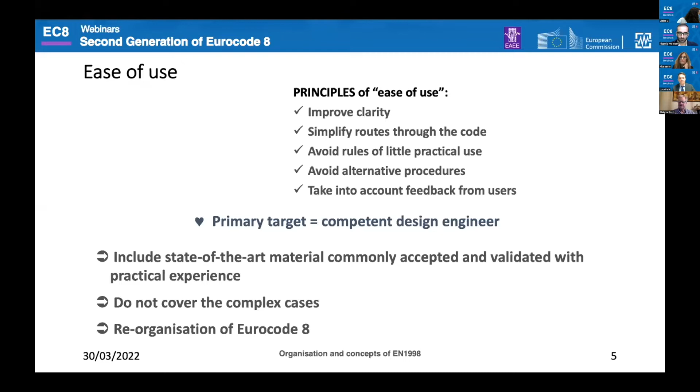Okay, so the general rule for a standard is to include the state-of-the-art material. So of course, all the recent scientific developments are accepted, but they should be, perhaps not worldwide, but accepted by the community in general. So it's not specific to one country, it's general, accepted and validated by experience. So consequence is that we do not cover all the cases. In particular, the very complex cases are not covered by the code. It's not the place for that. And as concerns Eurocode 8, the consequence for this clarification, for this ease of use, is to have a new organization of the code, and I will explain that later.

So one side of this clarification is to be clear on the meaning of the requirements. And there was a very important work made on the verbs which have to be used for the development. And in principle, in the texts themselves, in the requirements themselves, you will find only these three words.

So 'shall' is what we call previously a principle. This is a requirement which is strictly to be followed in order to conform to Eurocodes. And so for a principle, there is no allowed deviation.

'Should' is a strong recommendation. So in very specific cases you may have deviations, but of course it should be completely justified - either in a national regulation for a local situation not really covered by the Eurocode, or in the case of a rather complex structure not completely covered by Eurocode. In that case, you can justify that you cannot apply such a rule. Once again, the Eurocodes are here to cover 80 or 90% of situations, but not all, so it is allowed to have some deviation to cover the rest.

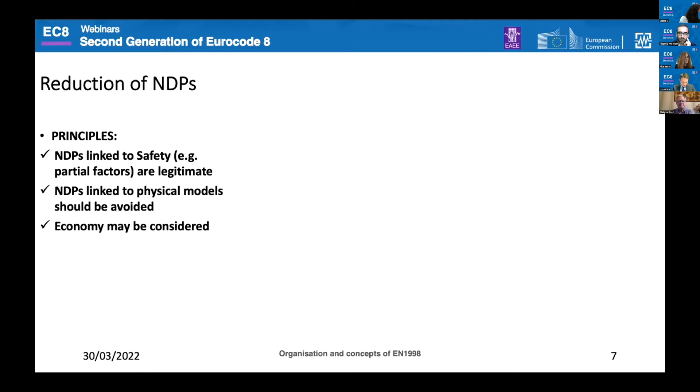In the case of Eurocode, in this table the organization is not exactly the same. On the left you still have 6 parts, but organized differently. I've tried to make a parallel: in the first column you have what we have now in the first generation, and in the second, on the right, what is anticipated now in the second generation. You can see that we have divided by about 2 the number of NDPs, and we have taken care in EC8 to focus only on the safety aspects and not introduce NDPs in physical models.

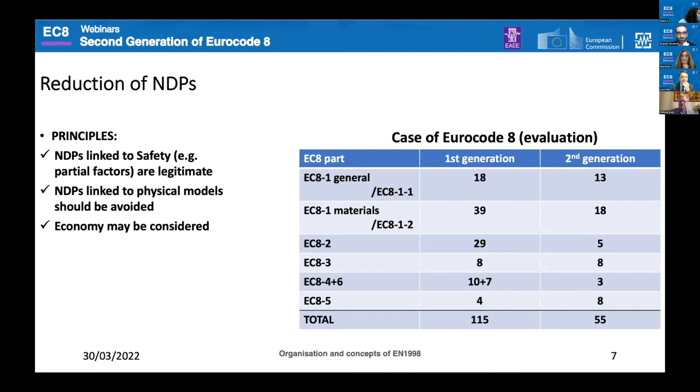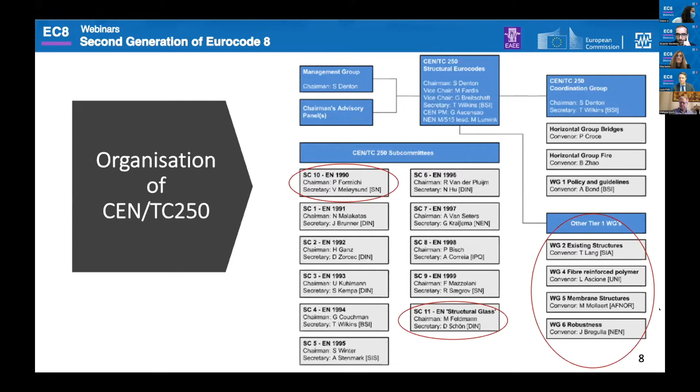So there is one on fiber reinforced polymer, one on membrane structures, and there is one which is transversal, in fact for all, which is a development about robustness of structures.

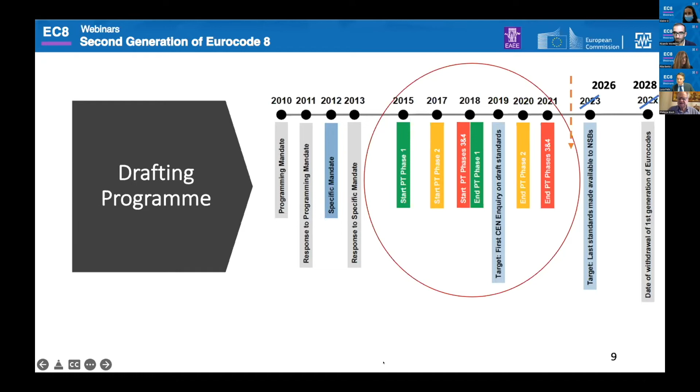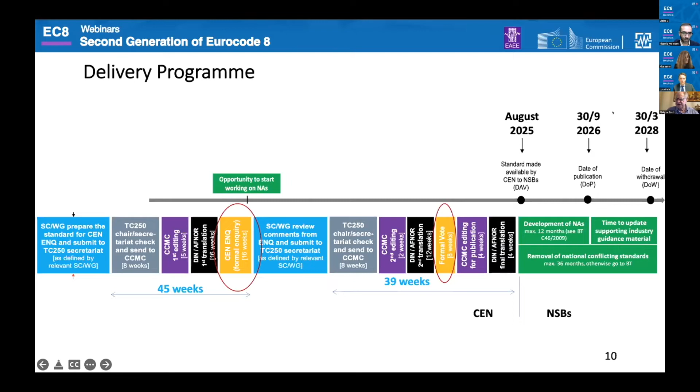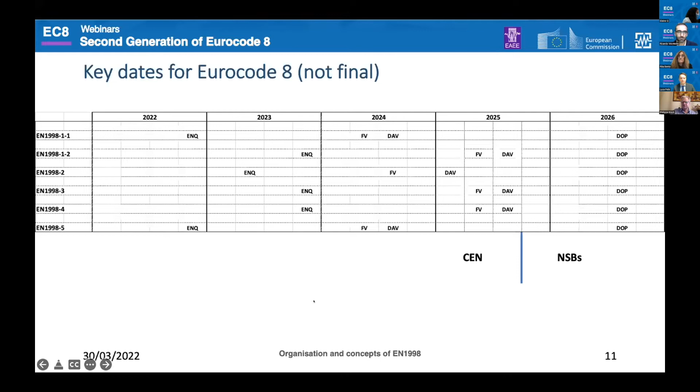Okay, after that, we'll have to, of course, take into account all the comments received and draw new drafts for final votes.

So there was, in the first generation, some inconsistencies between the general definitions given in Eurocode 0 and the ones that we were using in Eurocode 8. This has been, we have tried to align, in fact, to the definitions given in Eurocode 0.

And if you look at the definitions given in the first generation, in fact, there were not so many differences between what we call the importance classes and the consequence classes in Eurocode 0. So we have decided to align.

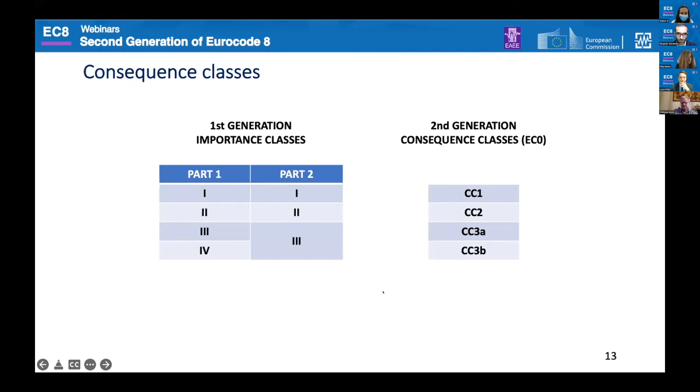The second point was about the seismic situation and the limit states. In Eurocode 0, you have clearly 2 types of limit state to verify: the ultimate limit state and the serviceability limit state. But it was rather different in the first generation of Eurocode 8, because you had these definitions: no collapse and damage limitation in part 1.

You have 2 similar limit states, but with different names in part 2. And in part 3, for assessment of existing structures, you had another one, a near collapse, which was added. So you can see it was not really very consistent, but of course this was explained by the calendar of development of the different parts.

So now what we have done is try to completely comply with the general rules given in Eurocode 0. We have also added another limit state, which is operational, so you can understand what it means. It may be used, for instance, for critical installations in hospitals or things like that, to assure the operability of the service during a given level of earthquake.

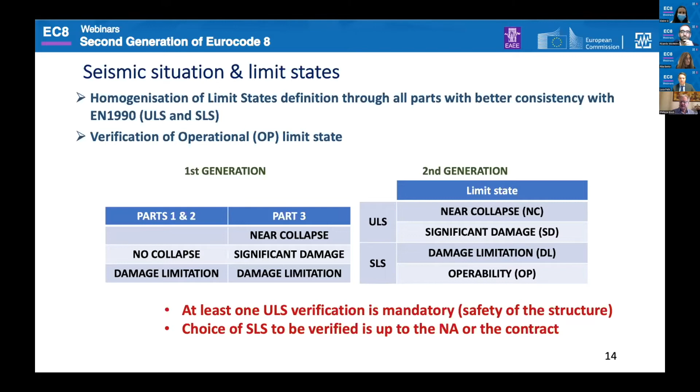In the different parts that we have, verification of at least one ULS is mandatory. The main aim is to assure the safety of the structure and of the people. But the choice of SLS is now open — for certain types of structure it can be in the national annex, or it can be in the contract. You will have the technical rules developed here, but it is up to the authority or the contract to decide whether they carry out this type of verification or not.

So what is new in Eurocode 8? The first important thing is that, in order to have a clearer organization, we have changed the contents of the parts. Not all of them, but the new organization is as follows.

Another target was to avoid repetitions. If you look at the present parts 1 and 2, between buildings and bridges, you had repetitions and even sometimes inconsistency. It was very important that all the rules common to all types of structure are in the same part. So you have a general part where you find the description of the seismic action, and the general rules of verification and analysis. Everything is there, and these general rules will not be repeated in the parts dedicated to structures — they will only be a reference.

Likewise, all the general rules linked to geotechnics or foundations are now in part 5, and so they are also common to all types of structure.

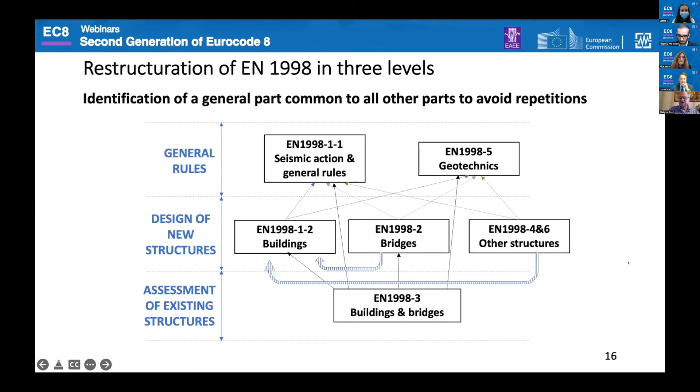So the second stage is for design of new structures. You have buildings, now separated from the general rules. You have bridges, as before, and all the other structures have been merged into one single part, which is now part 4. Part 3 has the same objective as previously: to cover the assessment of existing structures, but we have now included bridges in this part.

So a small list — it's very limited, just the main points of content now included in the scope of Eurocode 8: the verification of the operational limit state, the development of the displacement-based approach, and a complete development for structures equipped with anti-seismic devices, not only base isolation as before.

So there was a request from the Commission to have a harmonization of seismic zonation. This is an important point which will be detailed by Pierre Labbé later. Soil structure interaction has also been developed, ancillary elements in all structures, in fact, not only buildings, flat slab systems in buildings, infill frames and claddings in buildings, aluminum structures in buildings, bridges in part 3, so for existing bridges, timber structures in part 2 for bridges, and part 3 for assessment of existing structures.

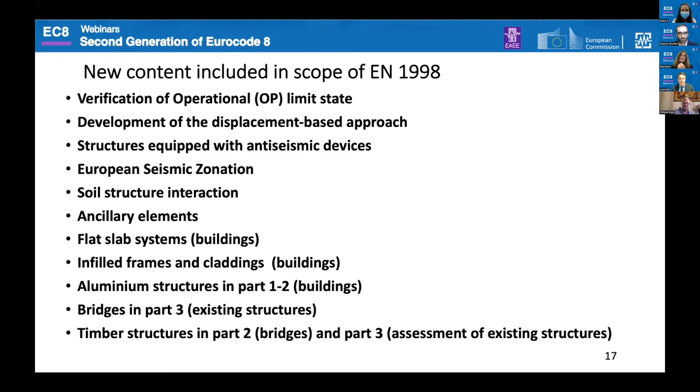So you can see, of course, there are more, but okay, here you have the main ones. But you also have changes of what exists already. So you have a long list of things which have been improved. The first one is about the seismic zones. You have a homogenization of the definition of the seismic zones. The simplification of the global safety choice through the seismic action classes. So you will have detail on that.

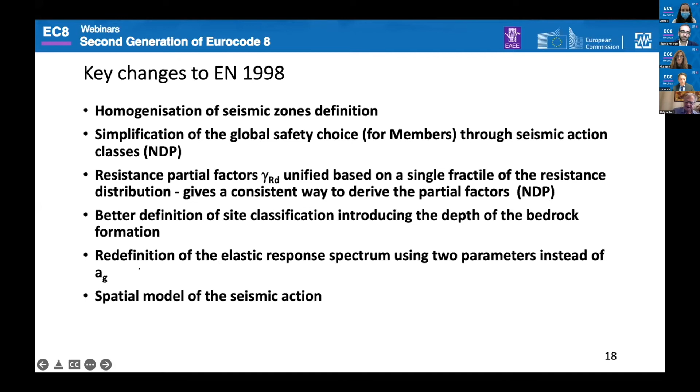A unified way of deriving the resistance partial factors on material. A better definition of site classification. So you will have also the details on that later. The redefinition of the elastic response spectrum, which is now based on 2 parameters instead of the ground acceleration, and the spatial model of the seismic action. You have a new definition of the ductility classes. Okay, you have 2 equivalent approaches for the analysis. You can use the force-based with the q factor or the displacement-based.

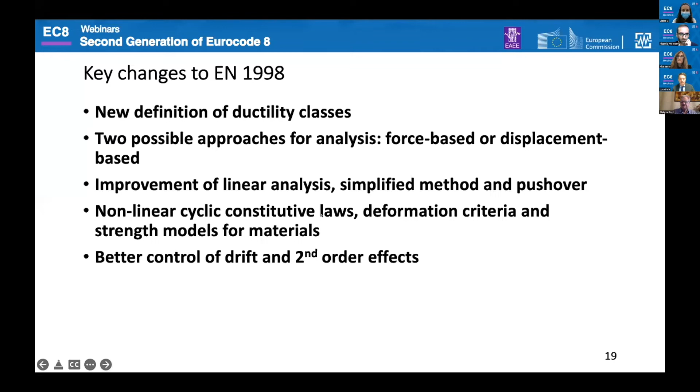You have several improvements on analysis. You will see that later. You have a better definition of the non-linear cyclic constitutive laws of materials, and a better control of drift and second-order effects. So coming to the general objective of the code, okay. You have this in your introduction, although it is in the introduction, so it is not mandatory. It is a good explanation of what we are doing.

So by nature, a perfect protection against earthquakes is practically not feasible, in particular because the knowledge of the hazard itself is characterized by a significant uncertainty. Okay, so what is important here? Therefore, in Eurocode 8, the seismic action is represented in a conventional form, proportional in amplitude to earthquakes likely to occur and representative of their frequency content. This representation is not a prediction of a particular seismic movement. Okay, so this is important. You know that when we introduce the seismic action, it is not a real earthquake, it is a representation of the earthquake.

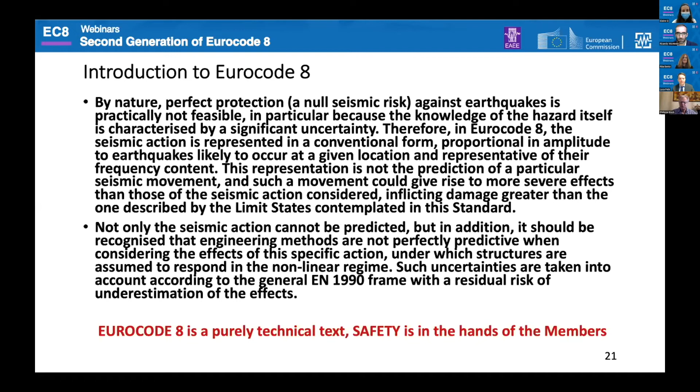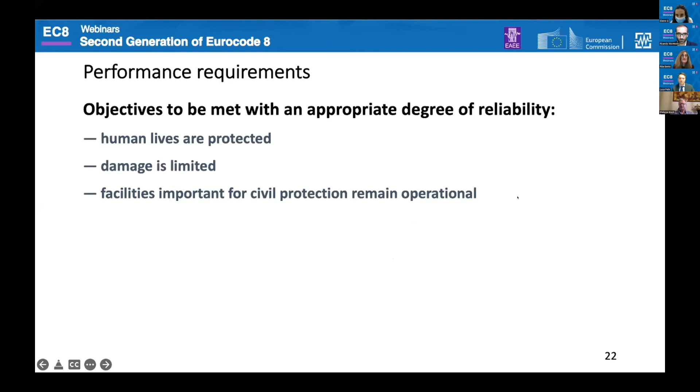Now there is another point which has been clarified because it was not always the case. Eurocode 8, as all Eurocodes, is a purely technical text. Safety is in the hands of the members. So we have to explain to the members what are the tools to be used, but we don't take their place. So it is purely technical, and we have tried to clarify this in all requirements. The performance requirements have not really been changed, and you know them: human lives, damage, and facilities important for civil protection remaining operational.

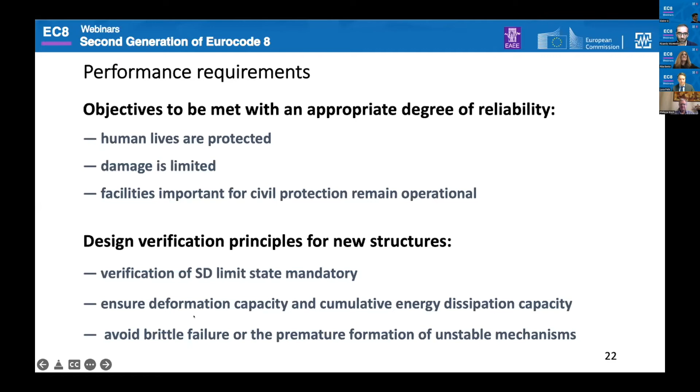The design principle: verification for new structures, so verification of the SD limit state. It is mandatory for new structures. To ensure deformation capacity and cumulative energy dissipation capacity. So this is, of course, important in all types of structure. And of course, avoid brittle failure and unstable mechanisms. So you have a description of limit states. I will not enter into that because we are late, I think.

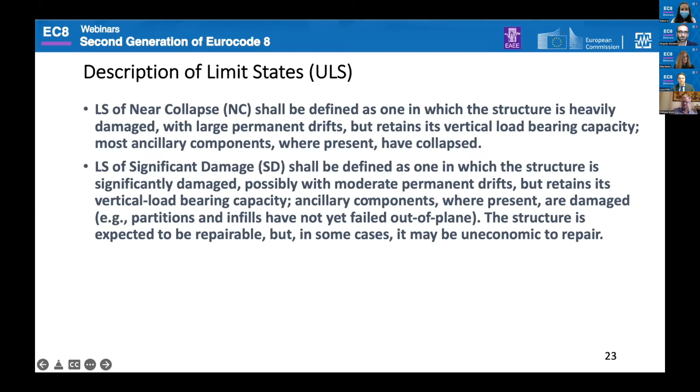Okay, so you have 4 definitions of the limit state. The objective of that is just to describe to the user what is the state of the structure which is expected at the end of the earthquake. So it's not a commitment, it's just a description of the target. Okay. So you have 2 safety choices for buildings. I think it will be explained in more detail by Pierre, so I will go rapidly on that.

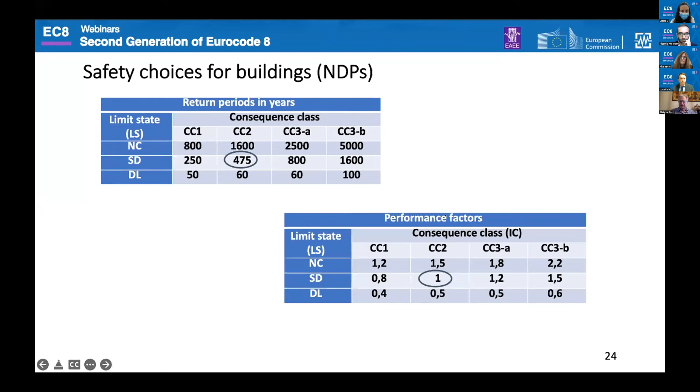So you have 2 ways to define these safety choices. It is either by the return period, and it depends on both the consequence class and the limit state under consideration. So it's no longer an importance factor. Before, you had an importance factor; now you have this approach in return periods, or the other one. The choice between both is made at the national level. You can use these performance factors, which in fact look like the importance factor that we had previously, but you can see that they are much more detailed.

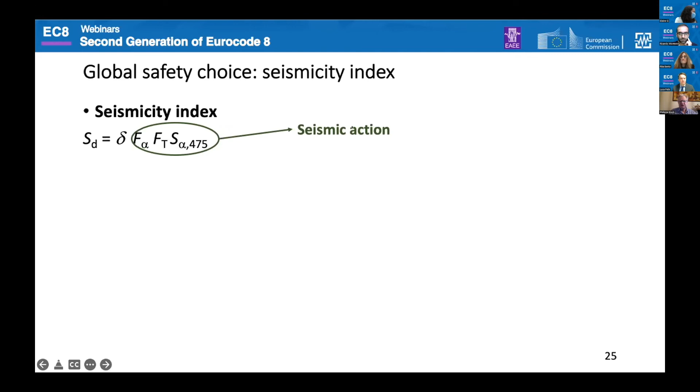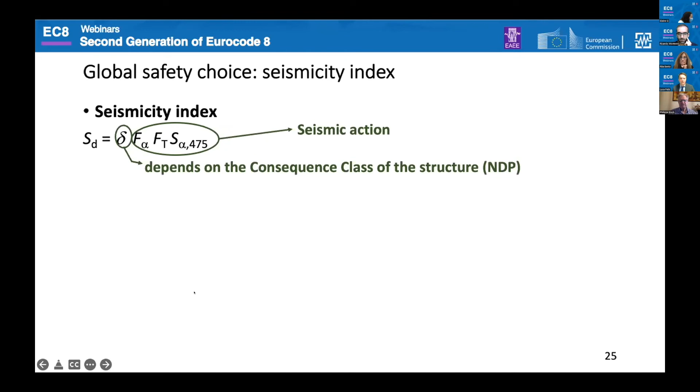This is a safety choice, so the seismicity index. It will be explained in more detail by Pierre. I don't enter into detail, just to say that in the definition of the seismicity index, you have a part which is only due to the seismic action. So let's say it is physical, and the choice which is given to the member state is about this value of delta, which depends in fact on the consequence class of the structure. So it is a global way for a given type of structure. So the values of this delta are for each type of structure.

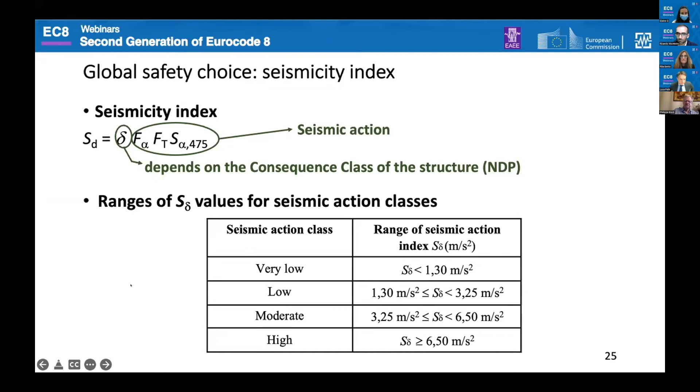And once this is chosen, then you have to refer to this table, which is fixed, and to classify the seismic action into seismic action classes. Okay. So once again, this is a safety choice, and it is not the same as the classification of seismic zones, which itself is based only on seismic action consideration.

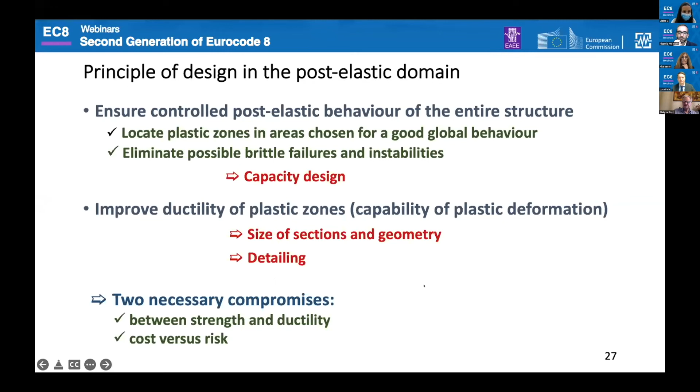Now, why redefine the ductility classes? Previously you had 3 classes, L, M, and H. Let's say M and H were based on the same concepts, except that H was based on more stringent rules, and the observation, so this is feedback, was that in fact DCH was not used very much. So this has led to the decision to try to do something else.

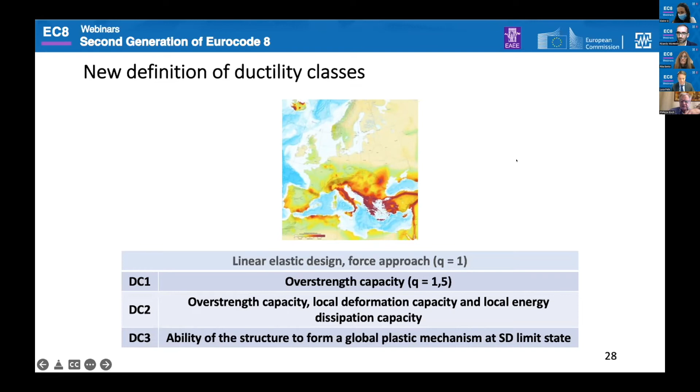So DC3, of course, can be used everywhere. It is a class with high ductility, where we assure the ability of the structure to form a global plastic mechanism. So it is a global behavior of the structure. DC2 aims at covering all the intermediate seismicity cases. Then you have a more local approach. So the local deformation capacity is assured, and there is some overstrength. So the definition is different and the practice is different.

Another thing we have done is to make the decomposition of the Q factor in 3 parts. The first one, what is called QS, is the overstrength. It is the one that we are using in DC1. So DC1 is similar to DCL. And this has been fixed at 1.5. We don't want to have discussion on that. It can, of course, basically be discussed, but we have decided to fix this to avoid conflicts.

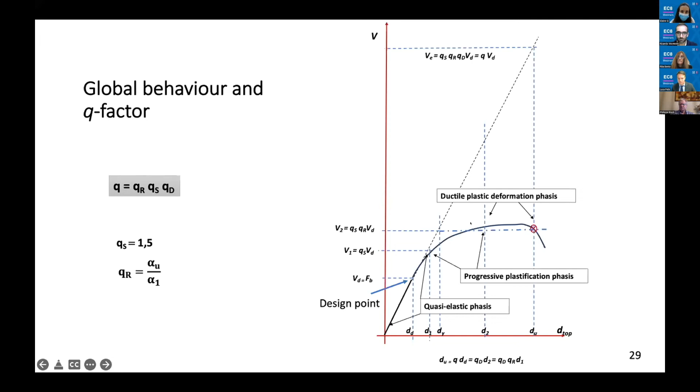QR is what was called before alpha U over alpha 1. So it represents the hyperstaticity, the redundancy of the structure. And QD is directly linked to the ductility itself, so it is the length of the plastic range. So you have here the comparison between, let's say, a pushover and a Q factor approach. So for that, in each material, you have the values of the different components.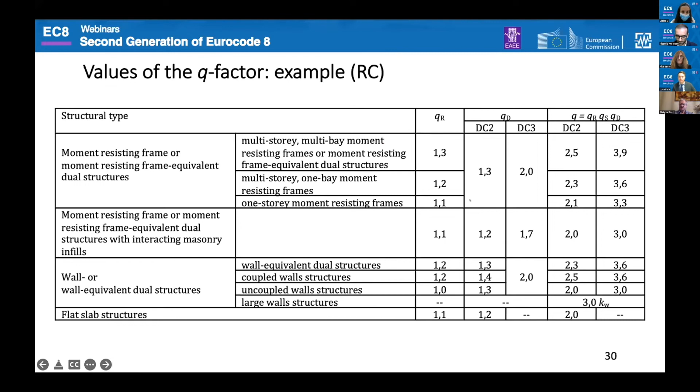So QS is always 1.5. You have here QR, which is similar, once again, to alpha U over alpha 1, and the value of QD, which depends only on the ductility class. Of course, QR does not depend on ductility class. Okay. Second point is that now you have limits.

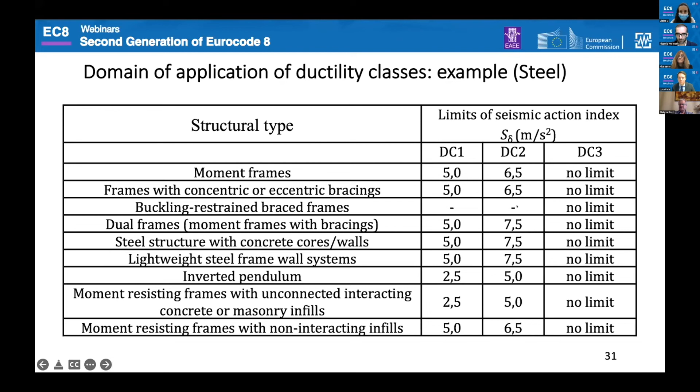But the limits, you remember that for DCL, it was recommended to use it only in low seismicity, but it was not reasonable because obviously the use of DC1 depends on the type of structure. So the limits have been differentiated according to the types of structure. The second point is that as DC2 has been developed for moderate seismicity, so now you have a limitation in the use of DC2. And of course, this depends on the type of material.

The verifications that you have to do, of course, they are the same as before: equilibrium, control of second-order effects, limitation of interstory drift, verification of member stability, so local stability, the capacity design for DC2 and DC3, and the verification of resistance, which of course depends on the type of material. For the force-based approach, of course, it is based on the other Eurocodes.

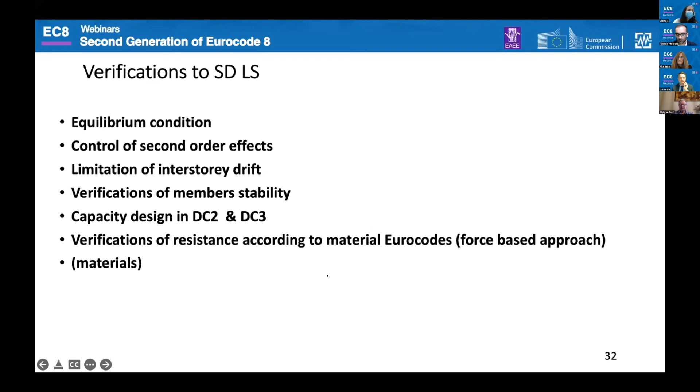Now for the verification in the case of pushover analysis. Okay, so you have two types of resistance. If it is a ductile mechanism, it depends on whether it is a rotation or an elongation or global, whatever it is. Delta is a parameter which defines a kind of deformation. Okay, so here you have the elastic deformation, and here you have the plastic branch.

Okay, so you can see that at SD, so significant damage, we have a coefficient here which places the target point somewhere on the plastic branch. Let's say alpha, it's a physical choice, so it is between 0.3 and 0.5. Okay, so we are approximately in the middle of the plastic domain. And above that, of course, you have a partial factor, which here is NDP.

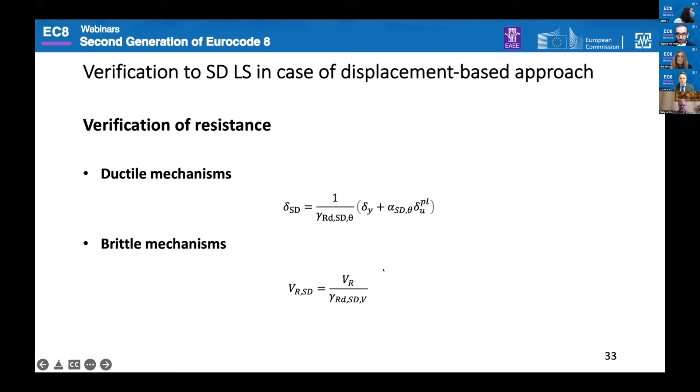For the brittle mechanism, for instance, shear in reinforced concrete, then you have, of course, the direct verification to shear resistance with partial factor. Okay, so I think it was long, but you can understand that there are many questions in your codes of interest. I tried to make a synthesis of this.

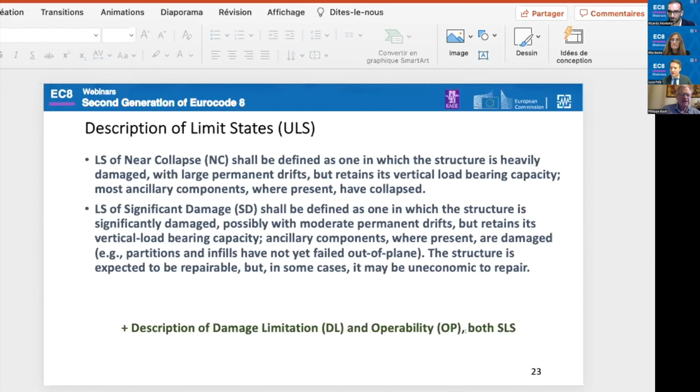Okay, thank you. There is another question by Andreas Nielsen from Atkins. I note the introduction of greater granularity in the return periods and the performance factors. Are the two parameters not really about the same issue, i.e. probability of failure or reliability? And if so, why have you chosen to specify the reliability in terms of two parameters when only one could be sufficient?

No, it's not exactly so. In the first generation you had the importance factors, but it was much less detailed than that. Now you have a complete table that depends on the consequence class and the limit state. Okay. So this is what was used by members with, of course, sometimes different values for the importance factor. But some countries, Portugal for instance, have changed that and have used the return period.

So what we thought was that it was convenient to offer the members the possibility to use both. Of course, they will make only one choice. So it should be in the national annex, where the member chooses between using the return period or the performance factor. So it is really, I would say, the feedback of experience. It is the observation of what exists now in the national annexes.

Okay. Now, as concerns the content, it is completely open to the choice of the member because it's completely about safety. So you have recommended values. They may be different for buildings and for bridges, for instance. So these tables are in the relevant parts, but you only have recommended values.

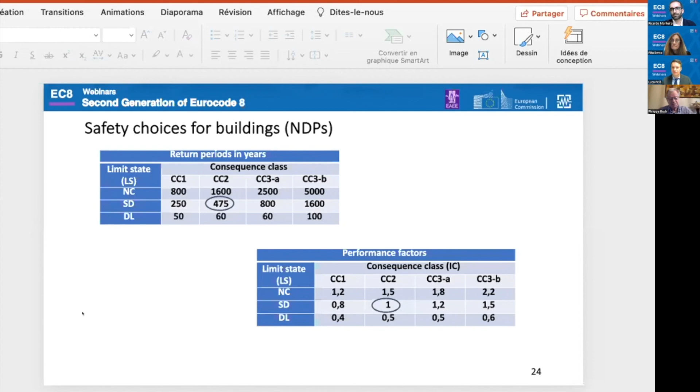But what should be considered is that the code is not supposed to cover everything, as I told you before. So if it is not covered in the code, then it is perfectly permissible to have documents in the member states themselves. The harmonization is only for what exists. You understand? But what can be done at the SC8 level is to develop in the future technical specifications to cover all these specific situations.